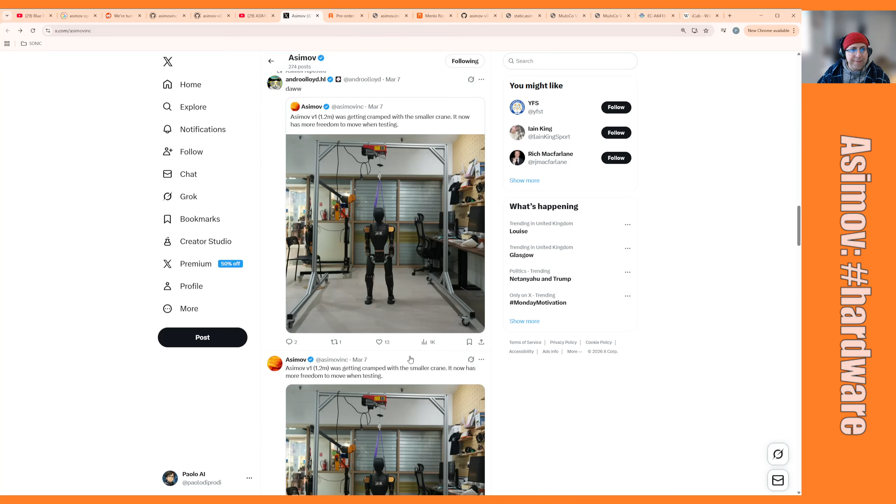Hello robot friends, today I'm doing a full review of this Asimov robot that was released by a company called Menlo Research, based out of Singapore. Before, they had only released the lower body - feet, legs and hip - but now you can see the whole thing, which is amazing and is available for pre-order. They've released a bunch of videos which look very promising, and there's a great team behind that.

So let's look at the actual video. Asimov. Okay, the first thing is I'm not sure if it's a speaker or an inductive charger - maybe it's a speaker. It reminds me of Iron Man, the core.

A new open source humanoid that's now available for pre-order. A team from Singapore-based Menlo Research has been building the robot publicly for months, while throwing shade at China's Unitree, which leads the world in humanoids. So it is a competitor for the Unitree G1, which is what I'm going to cover in my slides later. I'm going to provide a comparison and reference to the G1, because that's what they say.

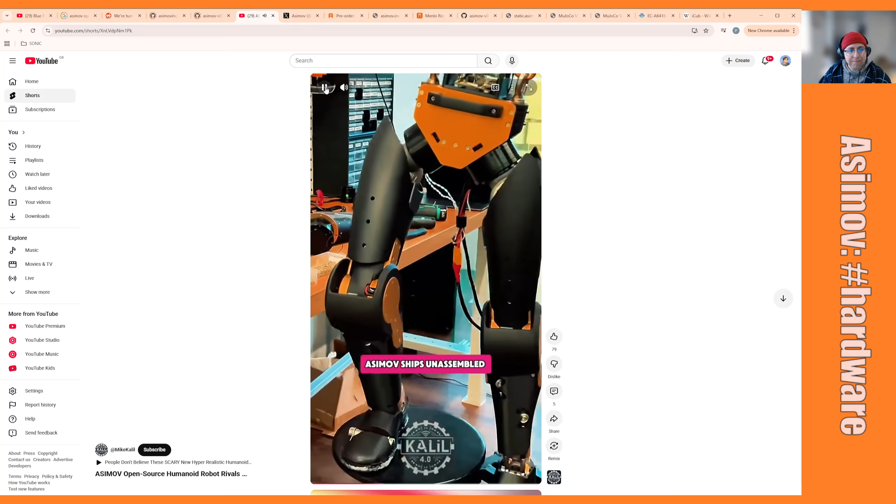Humanoid deliveries - Asimov ships unassembled for early. It's unassembled, guys, you have to build this. Look at that, I would love to build this. I understand they will give you all the parts - can't tell if it's CNC machined aluminum, steel, or polycarbonate - but the material is quite important, as I will explain later.

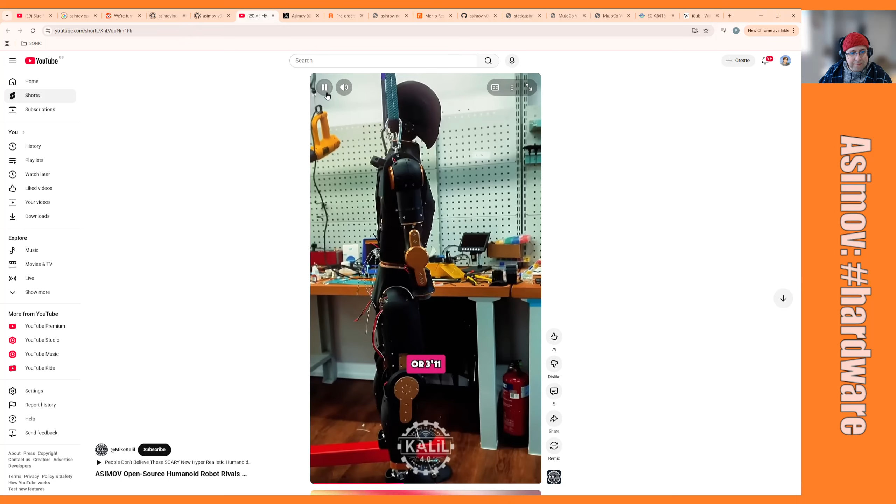Early adopters - standing 120 centimeters. That's the height, so toes to head, 120 centimeters, or just under 4 feet. The humanoid is a bit shorter than Unitree's viral G1, which has soared in popularity among researchers and developers since its launch. What was that, 2024? Let's Bruce Lee it.

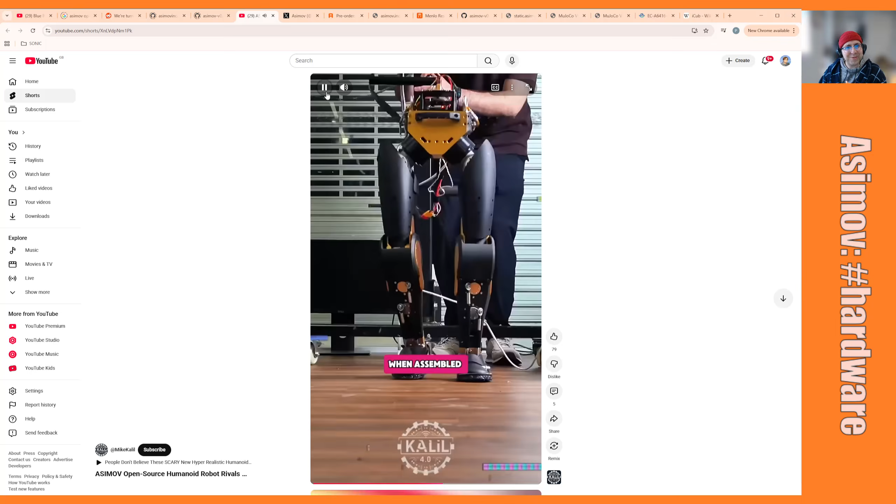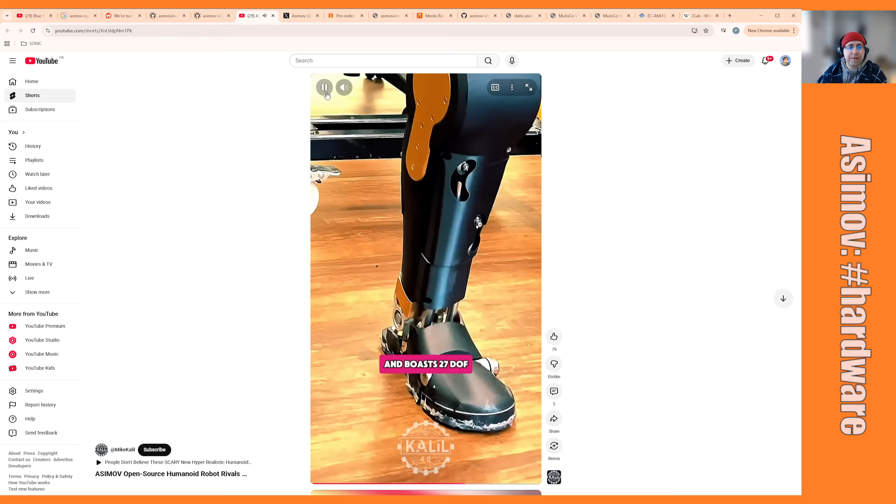Assembled, Asimov weighs 35 kilos or 77 pounds. I'm assuming that's with the actual battery pack, right? I think it should be the battery pack. And it boasts 27 degrees of freedom. That's amazing - that's a foot joint, which is very new. I haven't seen that before in a humanoid robot. I mean, I've built robots with that mechanism before, but not in a full humanoid robot.

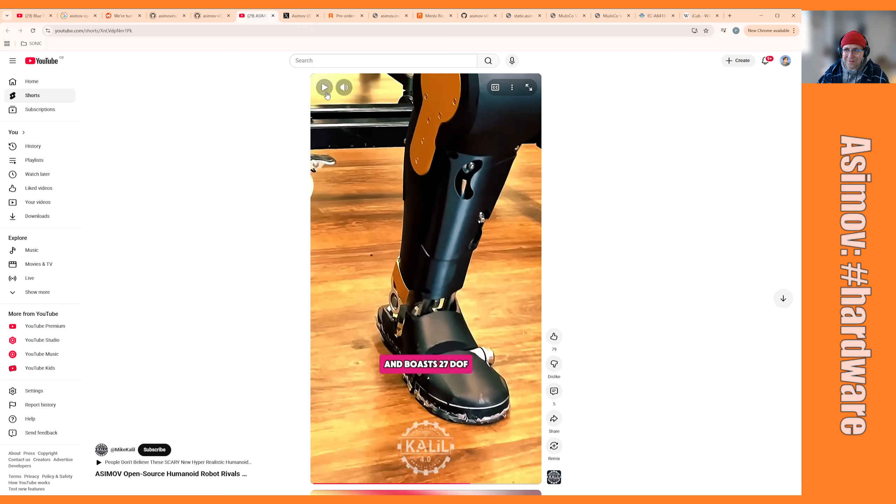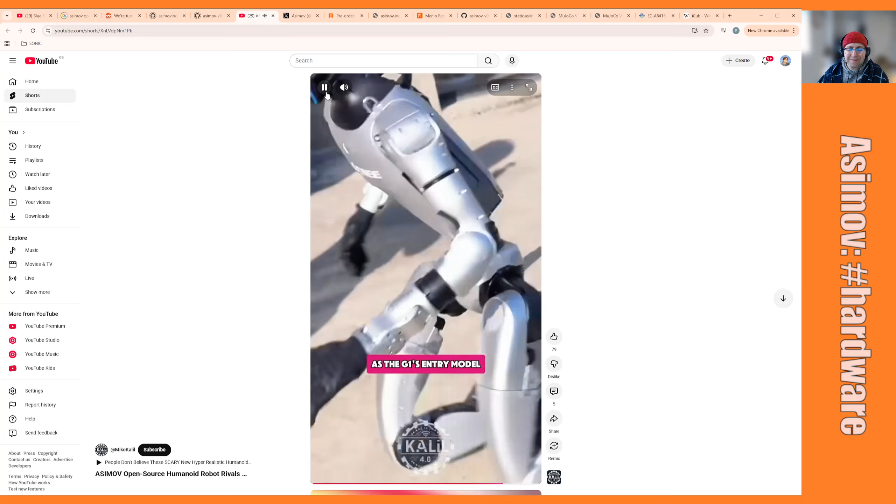Pre-orders require a $500 deposit. The targeted price is around 15 grand, about the same as the G1's entry model. However, Asimov is fully open, with configurability only available in higher-end Unitree models. This is great, so yeah, the video is amazing.

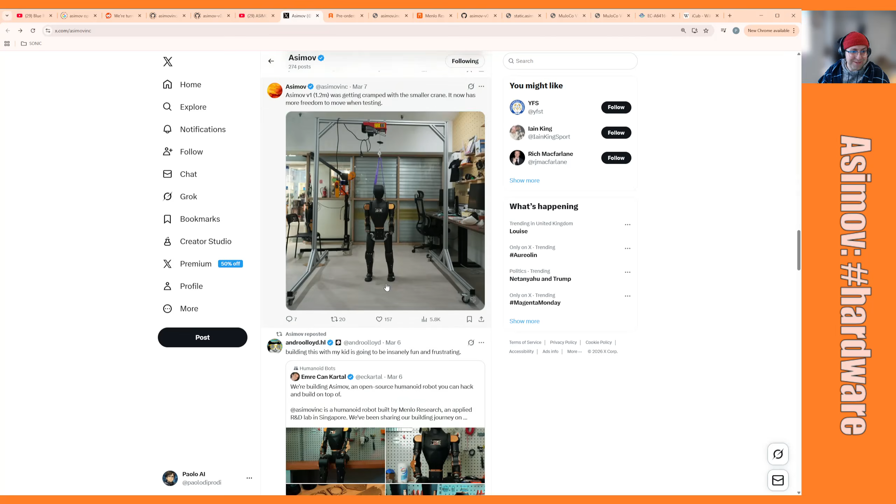I'm really excited to see this. I won't have the money to buy one, of course. And from these pictures you can see there are no hands, and I'm not sure what they've decided - if they are going to make the hands open source as well, or if they're going to use Anko's hands. I'll show you in my slides what I mean by that.

These parts, I'm assuming, are aluminum or steel. These are definitely Anko motors, and these ones maybe are plastic. It's very important because of the specs - they're talking about 15 kilos per arm for bicep curls, and 18 kilos for lateral raises. That's a lot. I don't think he can do it with plastic - just the heat is going to be so high that it's going to melt the plastic. So yeah, this is interesting.

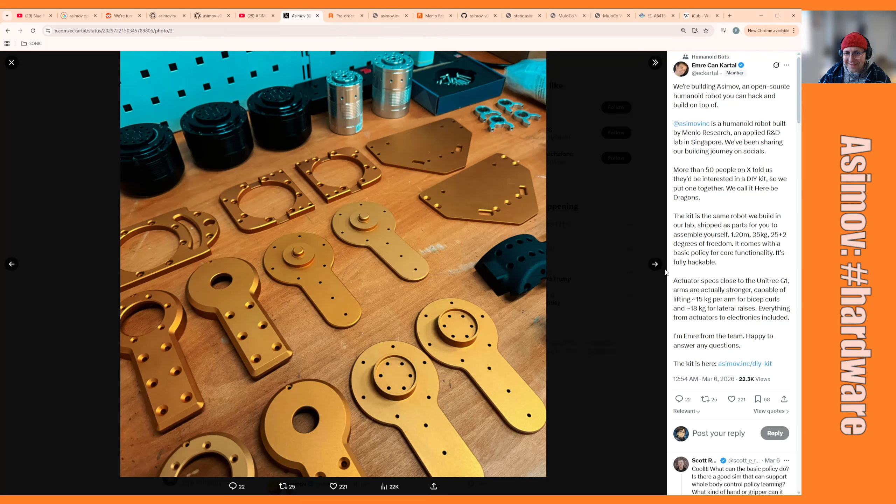That's the front, I can see there is a hole there - maybe the battery is behind that, I'm not really sure what's in there. The cables coming out, and those are the motors, you can see. I love this - I have the same hammers. These are quite nice. Those are the legs.

Yeah, it looks like it might be a combination material. It is not specified. I'm really curious about materials.

So what I'm going to do next in the next section is have a PowerPoint. I know nobody likes PowerPoints, but there is so much information that I had to collate it into slides, just to be more clear.

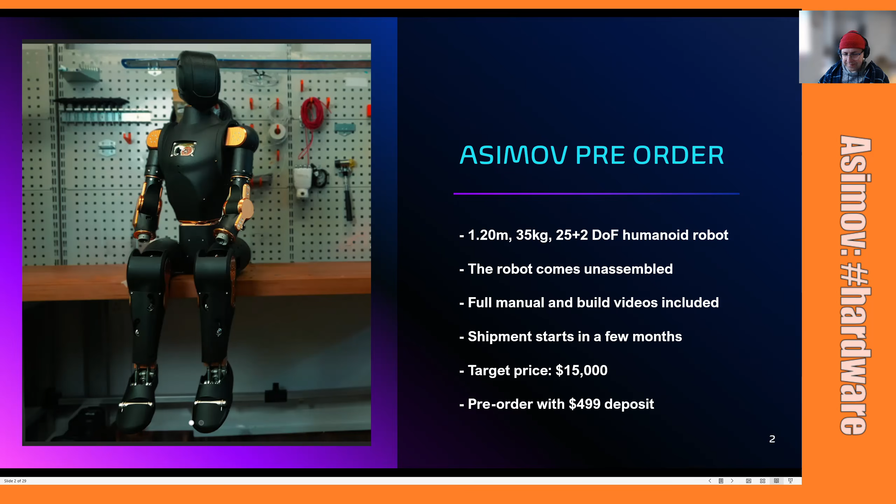But let's see. First of all, the name Asimov. Well, it's a famous sci-fi writer. I like him. That's why I went into robotics, to be honest, and probably most of the people out there came from the same background. He died when he was 72, I remember that, in 1992. So if you haven't read any of these books, I really recommend reading the Foundation trilogy, which was also featured in a movie, but the movie was really bad, so don't watch that.

I'm going to go for a trivia since we're talking about humanoid and open source. Do you know what was the first open source humanoid robot? I'll give you a few seconds. And I'm so proud to say that was made in Italy through a research group, as we call it, a consortium of research and commercial bodies. And it was released in 2009, which is many, many years ago.

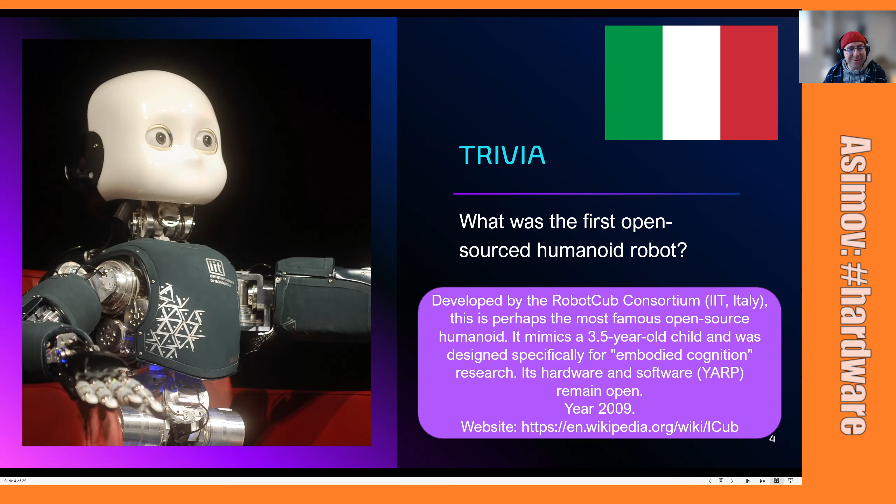Now we're in 2026. So it was really a feat of engineering and software development. It was very cute. It was supposed to mimic a 3.5 year old. I believe this project is still active, and I will try to reach out to one of my ex-colleagues because they have a lot to share about how difficult it is to develop a humanoid robot. So go and check it out.

The company itself is Menlo Research. Originally, to be honest, I thought they were based in the Silicon Valley because all these humanoid companies are either in Europe or in the Valley. But this is based in Singapore, so kudos to them. I like to see more Asian companies in this area, and they have 11 to 50 employees, it says. And they also do other things, not just the robot, but other platforms around the actual humanoid robot.

If you look at the vacancies, I like to look at vacancies just to see what they are hiring for. And they seem to be quite active. So they have internships and robot engineers in Singapore, but also in Vietnam, in Ho Chi Minh City.

And I've been to both cities, and I like them very much. It's great for holiday as well, to be honest. Look at the weather now in the UK. It's terrible. So, I mean, go and work for them if you want. It's my advice.

So let's talk shop. Just looking at the actual legs, I can only see the legs information for now. That's why I'm going to do that. So they have 12 degrees of freedom, so it's 6 per leg. And they have an articulated toe, and it can lift 15 kilos, but not the actual legs. The actual arms can lift 15 kilos, but it's very important for the legs as well, because you need to support that torque, right? When you're lifting so much, and it's quite a lot for a robot of that size.

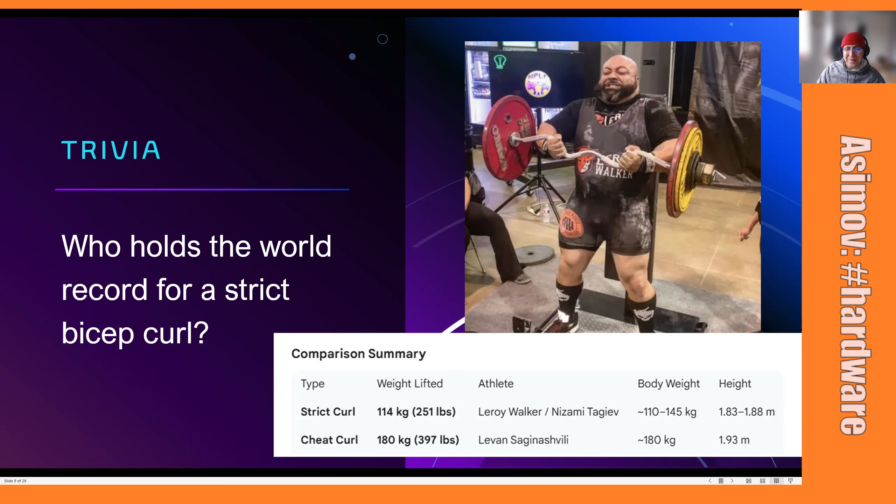So what will you need for a 15 kilo strict curl? Based on the Asimov weight of 35 kilos, and if you have a payload mass of 15 kilos, which is what is lifting, I'm assuming both arms in this case, or let's say one arm, symmetrical. And if the arm is 0.4 meters, because I don't know from the specs, and the torso height is 0.6 meters, and the feet are like 10 centimeters, you need to lean, right?

So there's no way you can do that with a robot of that size and weight. Even if the arms are super strong, it's going to face plant on the floor, as we have seen in other competitions. And so it's very important to also have strong torque motors on the hip pitch. So you will probably need like 55 Newton meters, and you will also need something like 60 Newton meters at the ankle.

This is just my simple calculation, and you will need to essentially lean back 16.5 degrees, which is what humans also do, right? You need to counterbalance that leverage with your body. So 15 kilos is a lot for a robot that is 35 kilos. I really want to see that in a video if they can release that.

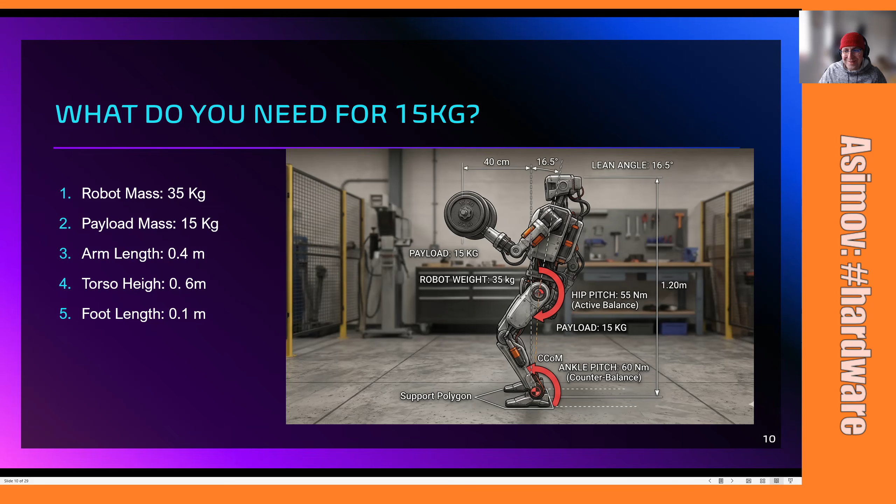And if we compare that to the Unitree G1, the base version can lift 2 kilos, and the educational version can do 3 kilos. So it's a massive gap between the Asimov and the Unitree. Plus, they also claim a lateral raise of 18 kilos, which I haven't done any calculation for. But overall, I'm really excited.

And the other thing, obviously, is the peak joint torque. You need to have that power, that torque, to be able to do that. And there is a 120 Newton meter spec, which I'm going to investigate.

They didn't release any models in the URDF format, which would be pretty good if you have to do reinforcement learning or imitation learning of some sort on a multiple GPU cluster, because you need that power of running multiple robot simulations. But I don't think that's a big problem. You can probably convert it from the MJCF to URDF, but for now it's not available.

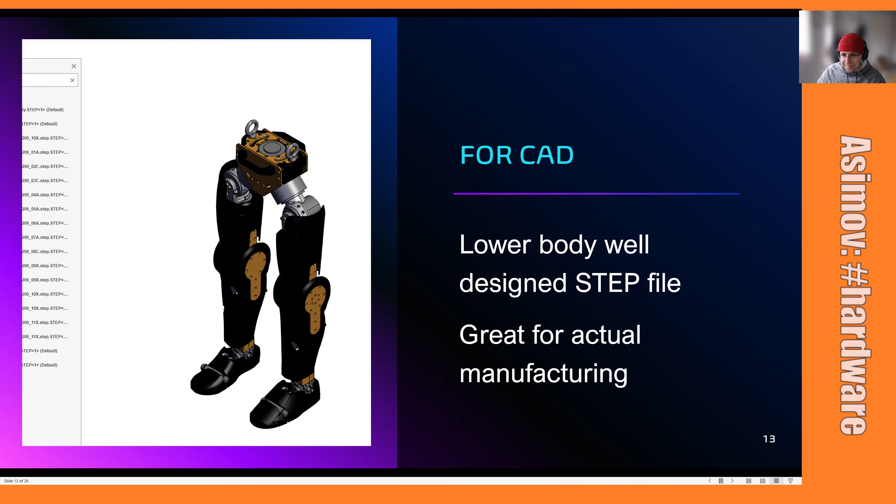And now let's talk about legs. The only things we got for now are legs. The left and right are identical. That's not always true in humans. We always have one leg that is stronger than the other one. But in a robot, you can have perfect symmetry. It doesn't really make any difference.

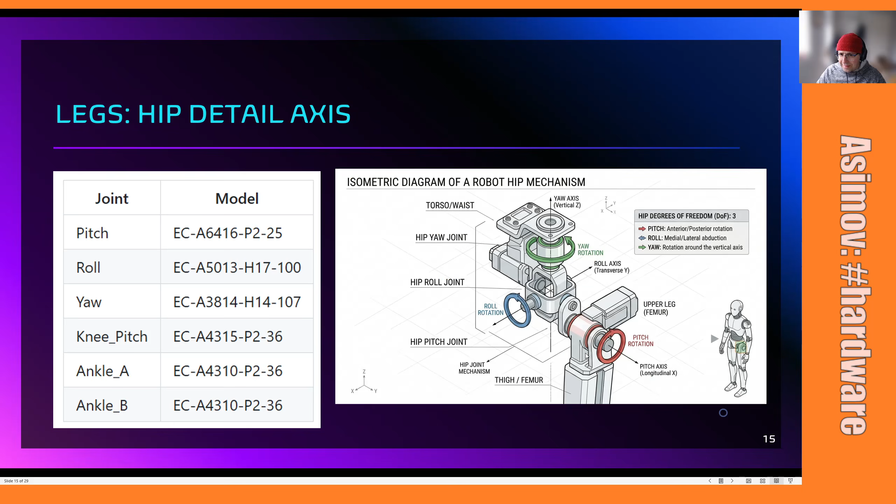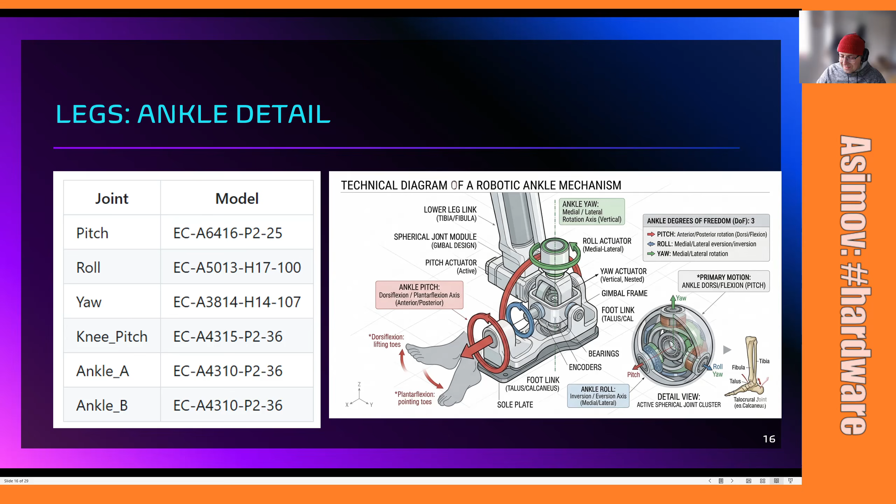So they have 2 degrees of freedom with minus 70 and 70 degrees, which seems quite high, and we will see why this is a little bit odd. So they don't have the roll actuator, meaning that you can't move your feet like that, and we can see that in the actual model file. Still, that's quite impressive. This is not from the representation, it's just to explain that potentially you can have 3 axes, but most robots have only 2. Which is not a big problem, but of course there are some things you have to consider during the inverse and direct kinematics.

Okay, so the motors themselves are designed and manufactured by a company called ENCOS. They are based in China, in the city of Nanjing.

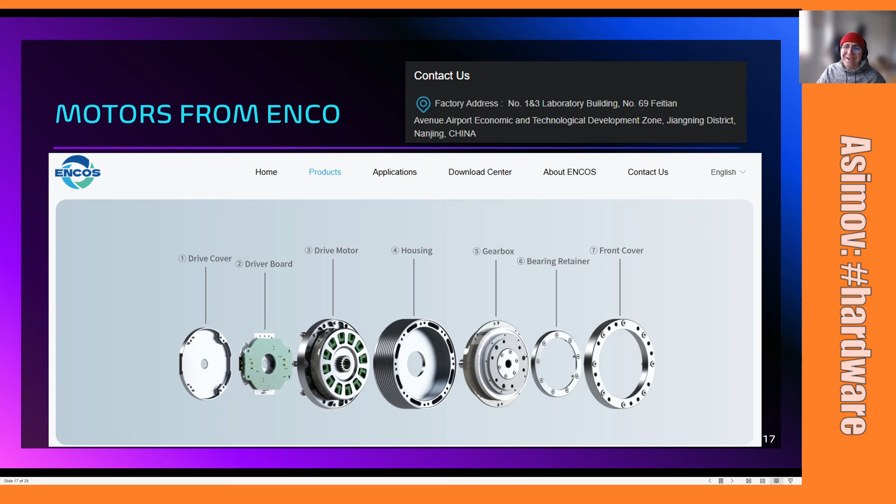I think I've actually been there. In the past, I used to do a lot of business in China, especially PCB manufacturing, and I also worked with some robotic companies, but I never used their motors before. So I can't really talk about the quality of the actual machines, but if they've chosen them, they're probably pretty good.

So I'm going to pick just one of the motors, the most powerful one, which is the one on the hip. The strongest motor on the hip, as we mentioned before, is 120 newton meters and has a weight of 805 grams. It's very important because if you're doing something very heavy, the hip is going to do a lot of the work to counterbalance that weight. You can go on their website; I only took some of the most important specs.

So you can control it via CAN bus. The CAN bus is the same one you have on your cars, a data protocol used to exchange information between sensors and the ECU. There's a double encoder, which is pretty good for providing safety, as you can measure very accurately if the motor is under stress and there's an external force bending the mechanical joints, so you can see the difference between an obstacle and how the gears are stressing in that direction.

Of course, you have to know the efficiency, 73%. The peak torque, we know that. The peak phase current is 60 amperes, which is essentially the maximum you can achieve, so you have to limit your supply. The power is 624 watts, so it's quite a powerful motor. And the voltage, 48 volts, is the same as the Unitree, which means they're probably going to have a battery with 13 cells or something like that. But I'm not so sure yet; I don't have any information. So the motor looks pretty good.

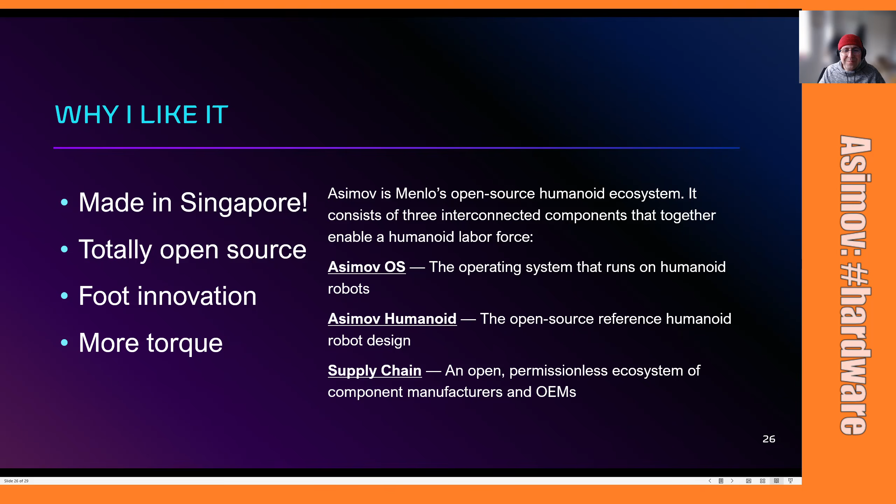Then they have the humanoid robot, which is the one we described today. And they also have a supply chain, meaning if you're an OEM or a manufacturer, you can say you're compatible, so you can build a robot with those components. But supply chain is very important, because if some of those vendors go belly up and go out of business, then you can't build a robot anymore. So that's kind of important.

Now, unknowns. So what's the battery size? Is the final price 15,000 including the battery and maybe the vision system? Does it have vision? I'm not so sure. Hand selection - what's the desired hand? I know you can swap your hands, but what will be the default choice? I want to know that.

Vision, as I mentioned - how do I mount vision on the head? What modules can fit in? When are we going to have the URDF specs? Because for people that want to do reinforcement learning or parallel training for locomotion development or VLAs, you do need to have those. And what's the choice between material and motors?

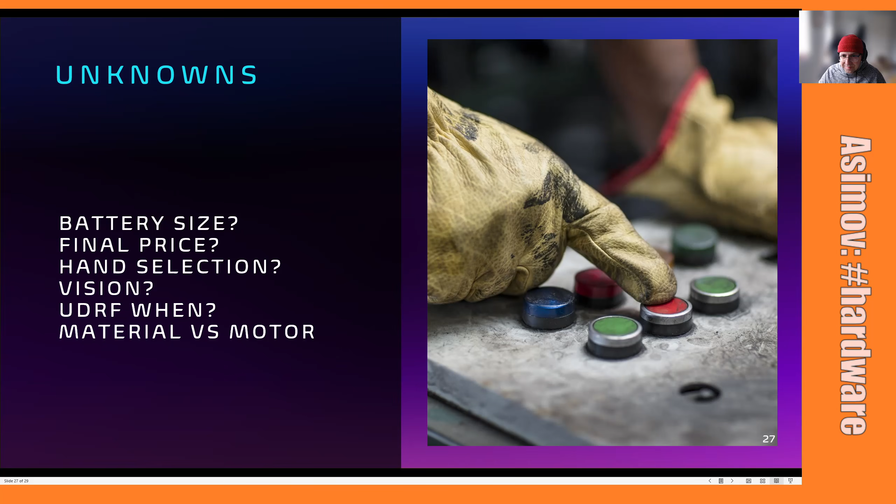Because materials are everything. Like, when you look at this pancake, I just had breakfast, I had a couple of pancakes, but they're called pancakes because they are flat and they are a good design.

But they heat up, right? At 48 volts, yes, you can calculate the peak torque, but as you push more current into this motor, you're going to dissipate heat, and the heat usually comes exactly from the mounting points or the actual motor.

And if you look at different materials, I have a 3D printer here. I do PLA, that melts at around 60 degrees. So 60 degrees is the actual temperature of my bed plate, which allows it to stick, but it's in a semi-fluent state. But when you go from 20 degrees ambient temperature in the UK, it's a warm day, but if you're in Dubai, it's going to be higher than that.

When you have plastic at 80 degrees, PLA starts to soften. My nozzle right now, well, I usually print at 198 degrees from the nozzle to make it fluid. But at 80 degrees, which is a quite common temperature if you have high torque, it's going to melt your PLA. It's going to deform it, and you're going to lose accuracy until it breaks.

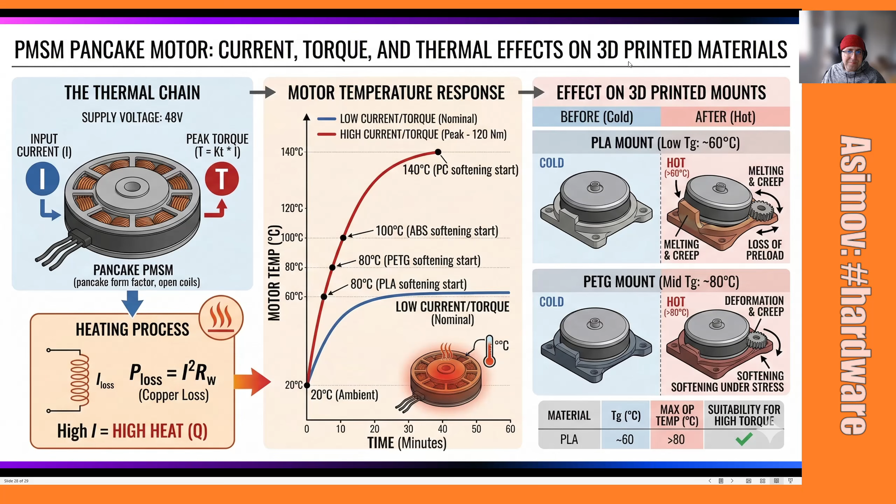So yeah, in general, and I have another tutorial about this, about materials and motors, but it's just a warning for now.

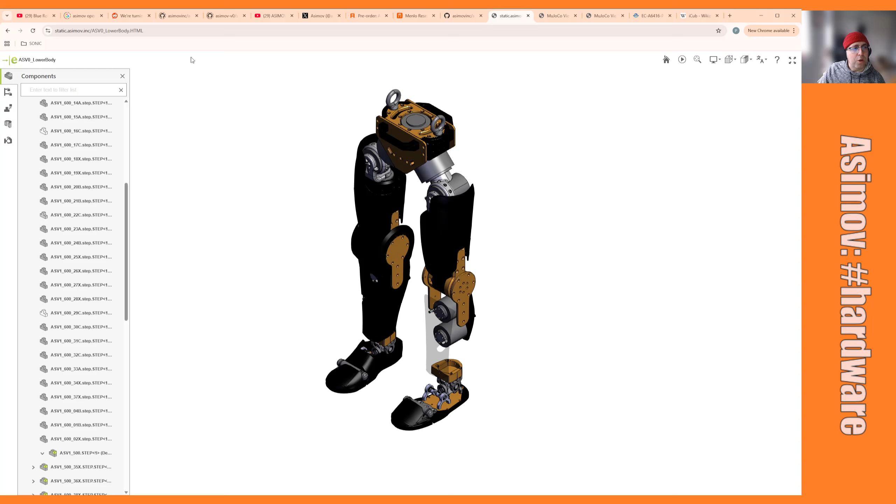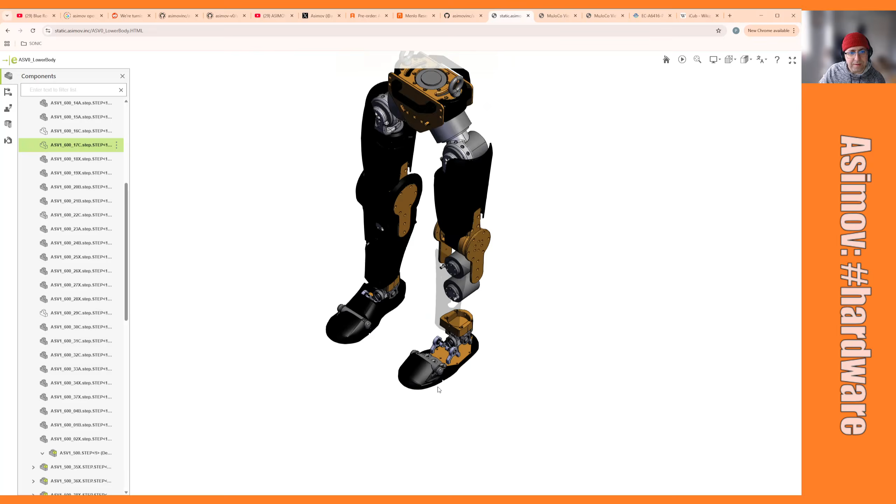They talk about their legs. So what I did first was look at the lower body. You can go here and see the actual joint for the foot, and you can hide or unhide things if you want. You can actually see how the foot looks like. I usually go into isometric mode, which makes sense, and you can zoom in and out. So yeah, that's the foot joint.

As you can see, it's kind of like a linear actuator, a rotational joint, so this can go up and down. I think this will give a more natural motion to the actual robot, but also more energy efficiency. As we walk, we have this kind of heel-toe motion, which no other robot has, so this will be very interesting. Maybe we'll also be able to balance on an edge and do calf raises like you do in the gym. That's one of the main differences.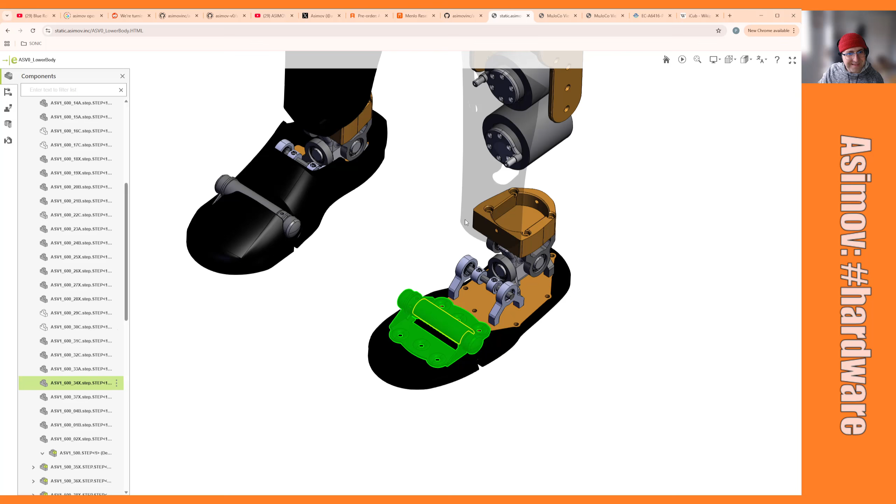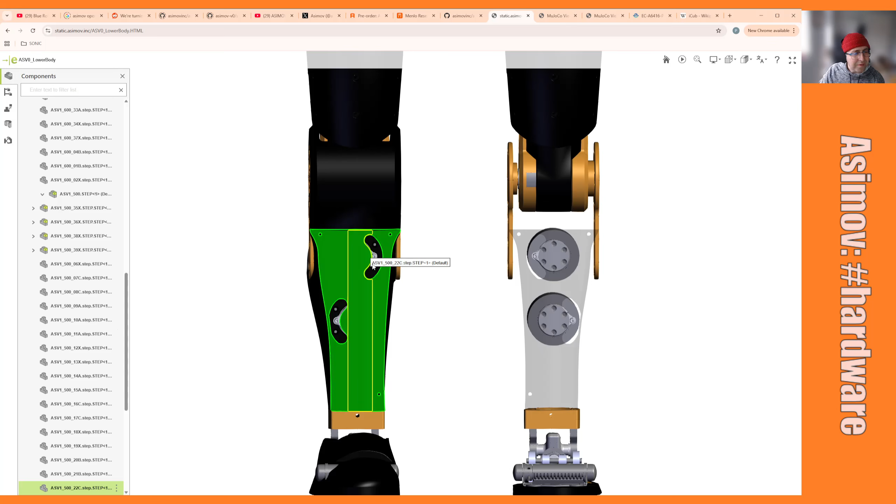As I mentioned before, these are for the foot, and the file is here so you can play with that. If you have Fusion, CAD, or other things, you probably want to use that. These ones are sort of open, so I guess it's to see how the joints are moving, or maybe for heat purposes. I think this could be metal or aluminum — I hope so, because of the heating. But yeah, this is the CAD.

Then you can load this in the Mujoco viewer. So I'm using this Mujoco viewer, you can load the robot. One of the things I mentioned is the ankle joints, so you can play with that, right?

First of all, I can move the foot, look at that, 0 to 60 degrees. Okay, makes sense. When you go to the right toe joint, okay, that's the other one, fine. When I go to the ankle pitch, I can only go between, look at this, minus 20, let's say minus 29 to 20 degrees — so it's not 70. I don't know why they say 70 degrees, which looks suspicious. For the roll joint, you go between 5 and minus 5 — it's not 70 either. I don't know why on the website they say 70. I can go here and tell you they put 70 degrees, so maybe it's the maximum theoretical on the motor. But yes, that's not 70, which makes sense.

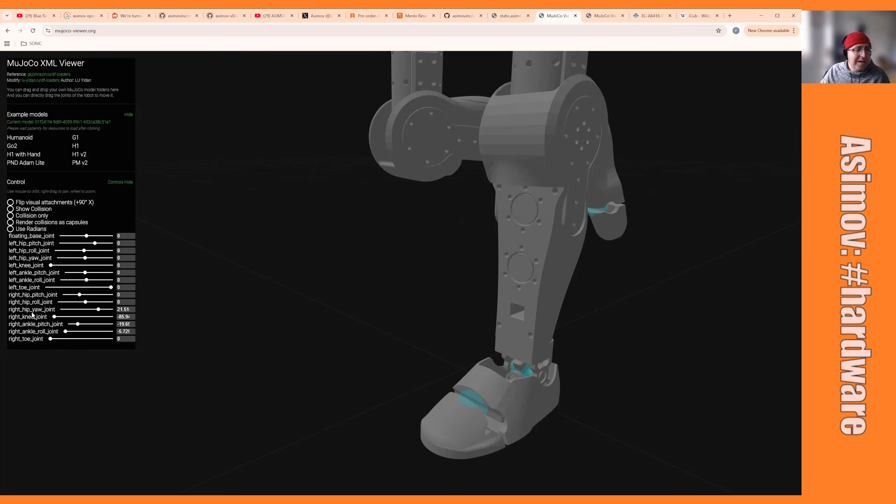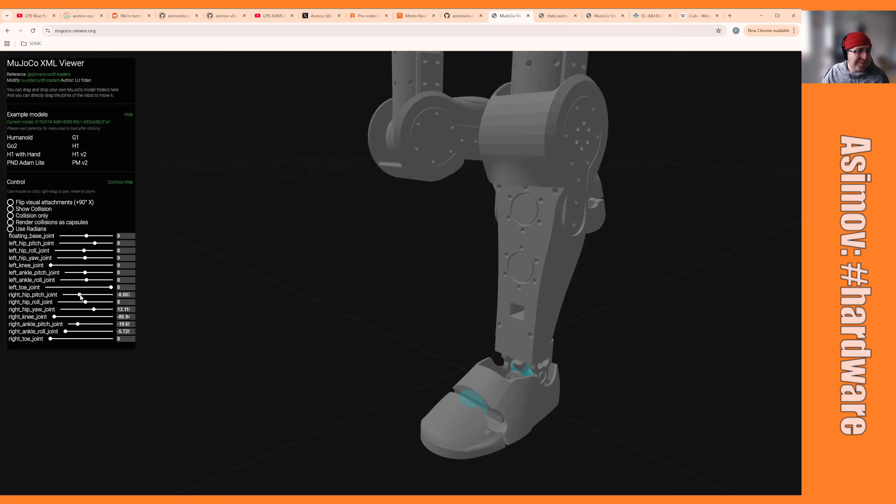Then we have the joint on the knee. You can see you can go to like 80, 85 degrees, which makes sense. If you go here — sorry, what is this? Yeah, 86 degrees, okay, that's fine. You can see it doesn't go as far as a human will go higher than that. I mean, I'm not super flexible, but I can definitely do more than that. But that's fine. Then, as we mentioned before, on the hip you have the pitch — sorry, I touched the other one. Let's go on the left side, can't even tell left from right. Yeah, so this is the pitch, right?

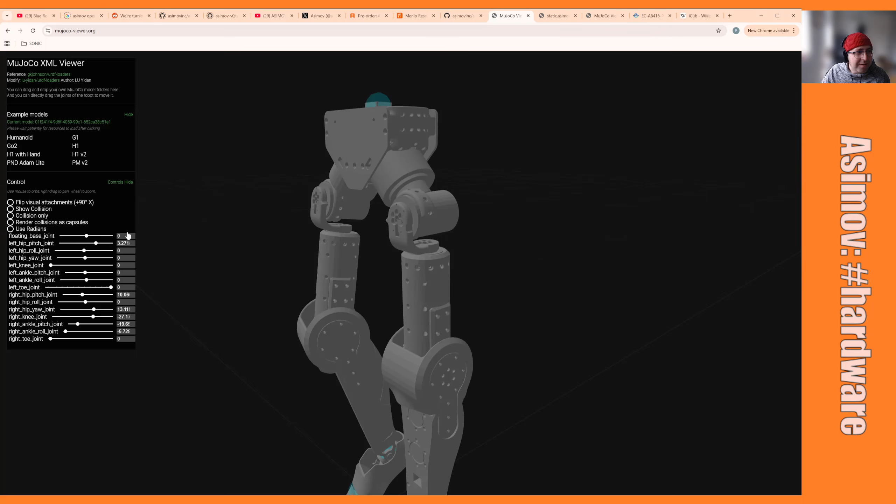Look at that. Notice how this is kind of like a 40-degree, 45 angle. It's not going on a linear plane, so this is something you have to consider. Look at the swing, right? And then you have the roll, which is, yes, as you mentioned before, and you can swing.

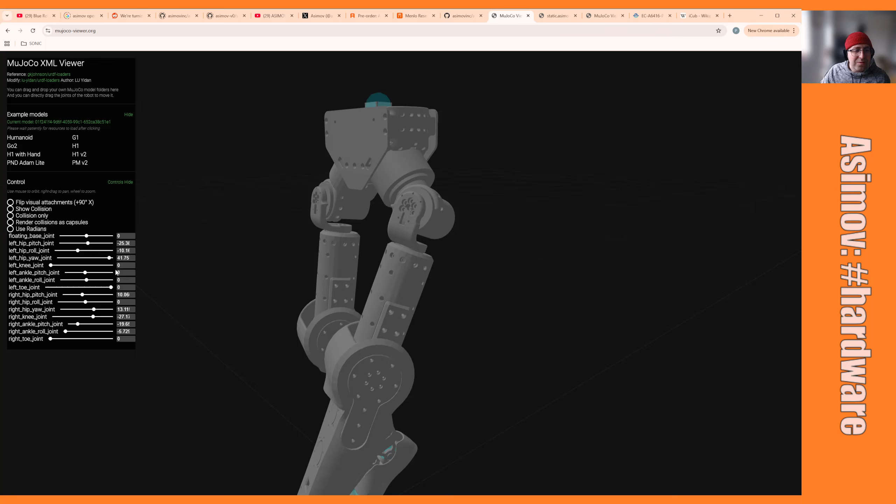So the yaw is essentially when you rotate your upper, or the kind of hamstrings, right? The femoral. So yeah, that's also pretty good. And then you have the floating base joint, I guess this will be on the top. I don't know if this is rotating or just a reference point. And then you have the pitch, so yeah, we've seen all of them, right?

So this goes higher, it goes between 29, let's say 30, and minus 50. So a higher degree of mobility. And this one is minus 15 as well, so it does a little bit more than the Asimov. What else can we do?

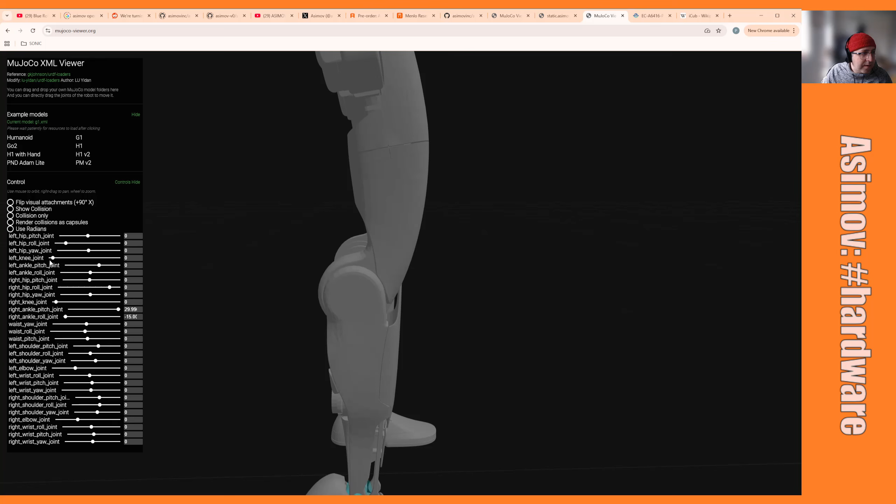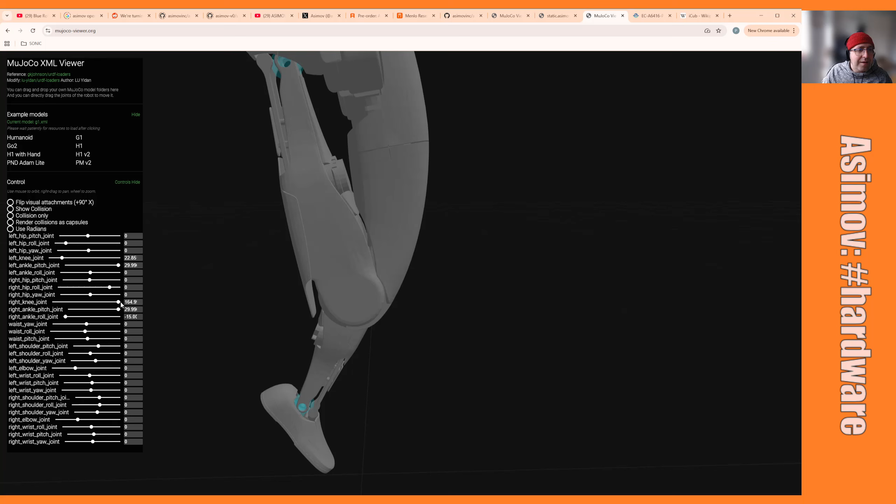Let's look at, if you look at this one, where is the left knee joint? Sorry, that was the right. This one is, yeah, I am terrible. Right knee joint, there we go. As you can see, there is pretty big a range here. Look at that, he can essentially touch the back of the muscles there. So, yeah, bigger degree of motion for sure. I'm not making things up.

And the waist, so the waist is also interesting. Now look at the hip movement, let's see if I can show you that. So the Unitree uses a 90-degree, right? Because if I go on the left hip pitch, this is a planar movement. It's not 45 degrees like the Asimov does here. So that will make it easier, I guess, to control. I mean, intuitively, if you're doing direct or inverse kinematics, they are orthogonal joints.

And look at that, I mean this guy is like, I'm not sure even a contortionist can do that. I've seen people in the circus doing all sorts of crazy things. Maybe it's possible, but he definitely has a greater range of motion. So there's definitely a collision there. But that means you also have to be careful when you do that, because yeah, I'm touching the other leg.

And let's see, this is similar, and I think they also do more here. There seems to be a full 157 to minus 17. So overall, the Unitree still has a greater range of motion for sure. But I think this 90-degree has more stress. If you think about when you're walking, you have this thing pointing at a 90-degree angle, but if you have a 45-degree angle, you can definitely absorb more energy, which I think is why the Asimov has that kind of design. So I think your motors will thank you, although your controller will not thank you since it's not a 90-degree orthogonal configuration.

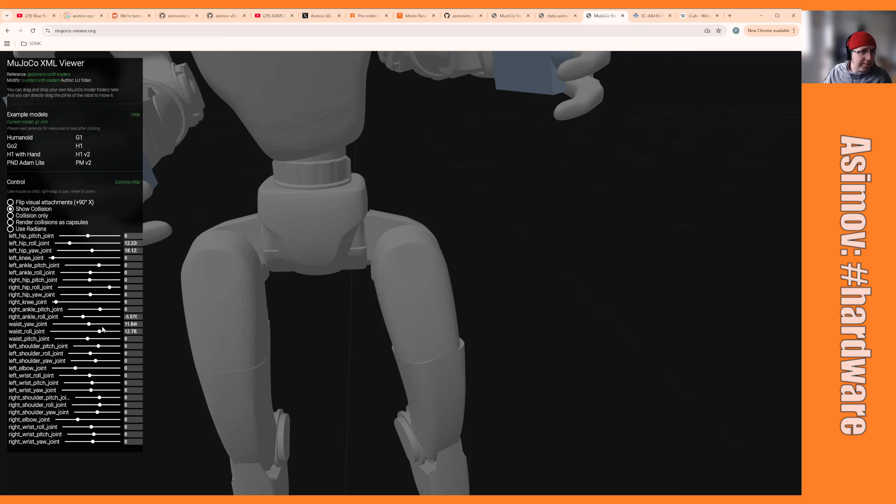Of course, I can't tell anything on the top. I think, well, they have a waist. Yeah, so they can yaw, which I guess the Asimov will probably have the same thing. But they can also roll that way, and there's also a pitch joint. Yeah, so I think the Asimov will probably have a similar mechanism there.

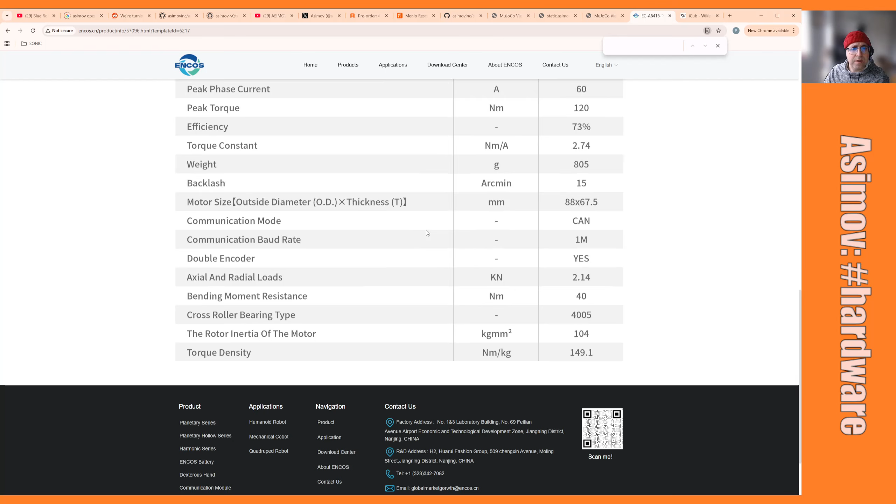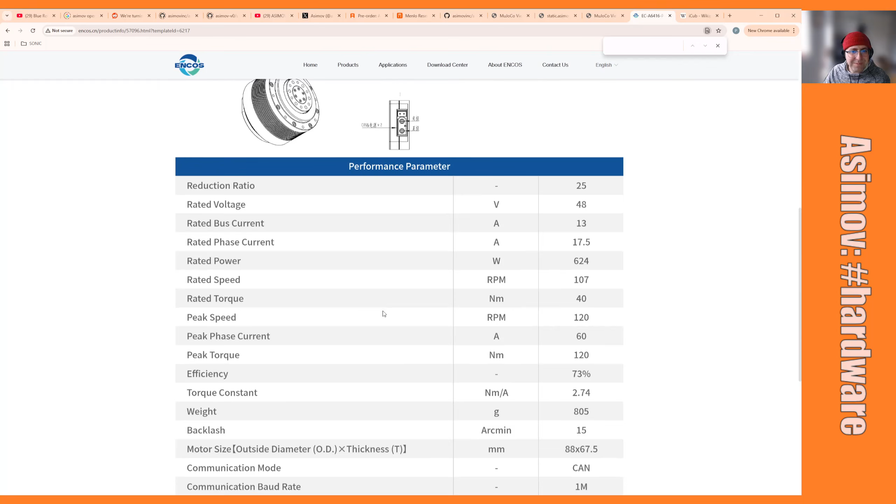So yeah, this is just kind of a quick comparison on that one. For the motors, you can go here and check what they are, all the specs. I mean, it's annoying, there are images, not actual tables, and I can't find. Maybe there's a PDF here. I couldn't find a PDF. Maybe because I'm in the English version, so I'm not sure. Sorry, I should have gone Chinese. Maybe my Chinese is really rusty, but I don't see PDFs of some sort. So I don't know. Maybe when you ask for that, they will give you.